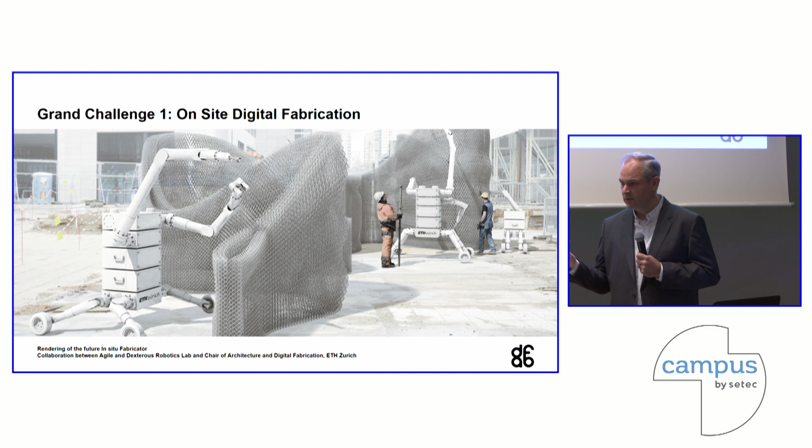So we see robots changing from being these big, heavy machines to being much more lightweight, fluid machines that can operate in conjunction with people and that don't pose as much danger to people as the robots we know from current manufacturing facilities.

Getting back to the NCCR digital fabrication, we have these two areas of focus. We have on-site construction, where we're looking at robots, taking them out of their space, giving them sensors, making them contextually aware, making them able to work with humans on the construction site. At the same time, we have prefabrication, which is really the question of how you build things which you then transport to site.

We have the ability to control the tension at the individual nodes within the net so that we can reformulate the shape of the net actively. So as you apply concrete to it, the net sags, we can tighten up the net and it will go back to its shape. In that way, we can completely eliminate formwork while creating complex structures.

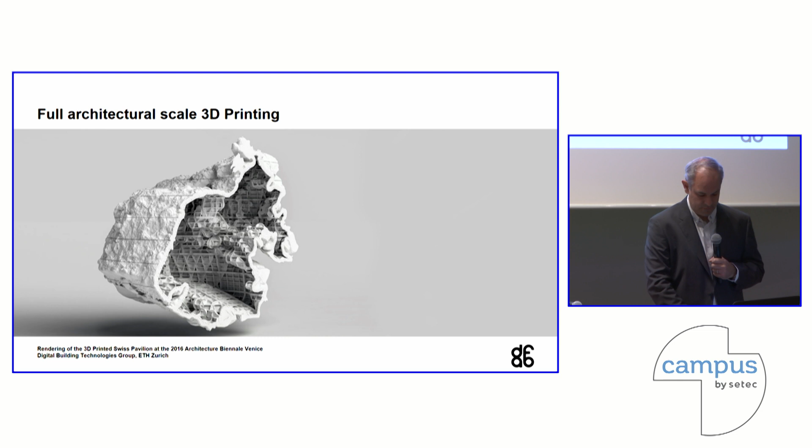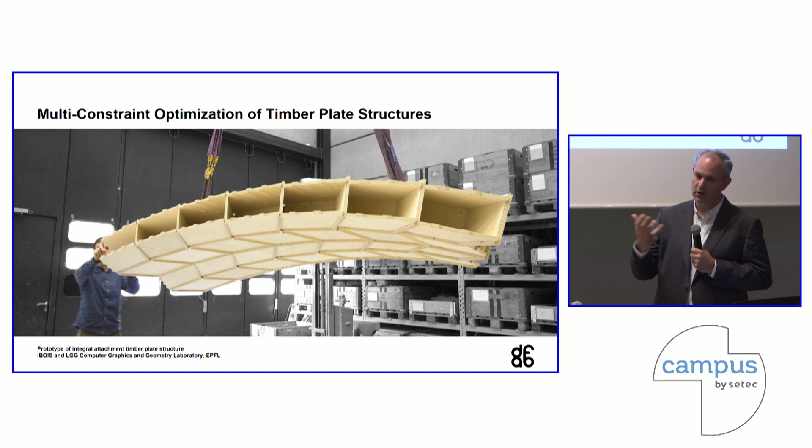We look at the robotic joining of structures.

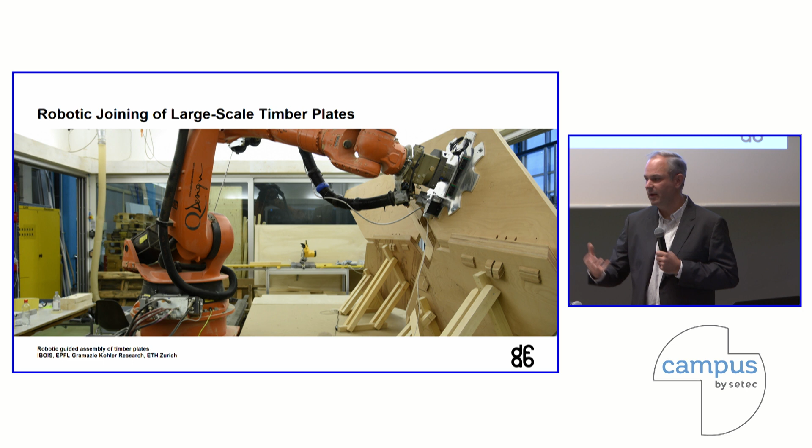The easiest way to imagine that is that a brick is the size it is because a mason can lift and place a brick all day long. If you replace the mason's arm with a robot arm, then what's the size of the new brick? Because the robot arm you can make any size, and you can use it to twist and join things in very prescribed, very accurate ways. All of a sudden you have new ways that you can join things together with only the force of a robot behind it rather than the limitations of the human hand.

We can take that even further and say what happens when you have two robots working together. When you have two robots working together, you can use one of the robots to hold things in place while the second robot positions the next piece. You can completely eliminate structures, scaffolding, formwork, and all the other componentry typically used to place things very precisely in three-dimensional space, such that you're able to build up composite structures.

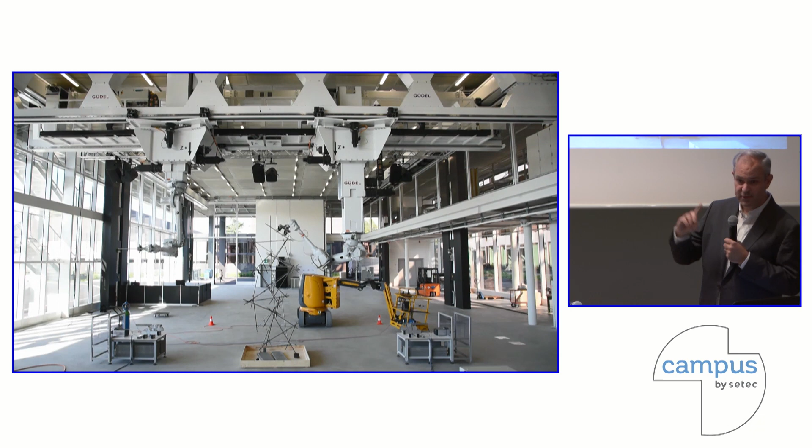Now, as you're watching the video, please pay attention to the sun because you'll get an idea of how slow this process actually is. The structure was built over the course of two days because all of these things we do are prototypical. We've never done them before, and if we do them once, we typically don't repeat it again. That means the processes we're involved in tend to occur over longer periods of time. But we know that after we've done it once, we know how to refine it, we know how to take steps forward, and eventually the goal is to hand it off to industry.

Switching out of the fabrication facilities and into the real world, we also build mobile robots equipped with sensors and manipulators to do things like build these brick walls, which ETH is very well known for. This is a robot that can move itself around the construction site, from one place to another, thereby effectively becoming a 3D printer. But rather than dropping little blobs of material to create something, it picks up building components, whether bricks or pieces of timber, and that allows it to build structures much bigger than itself.

It also has the ability to know its accurate position in three-dimensional space. Like a construction worker, if I move from one place to the next, I have a bunch of references I can triangulate and then place the next piece. This is very easy for a person to do, but extremely difficult for a robot. So a lot of the research on this platform was put into making sure the robot knows accurately how, when it moves from one place to another, it can continue to build with construction tolerances in sequence.

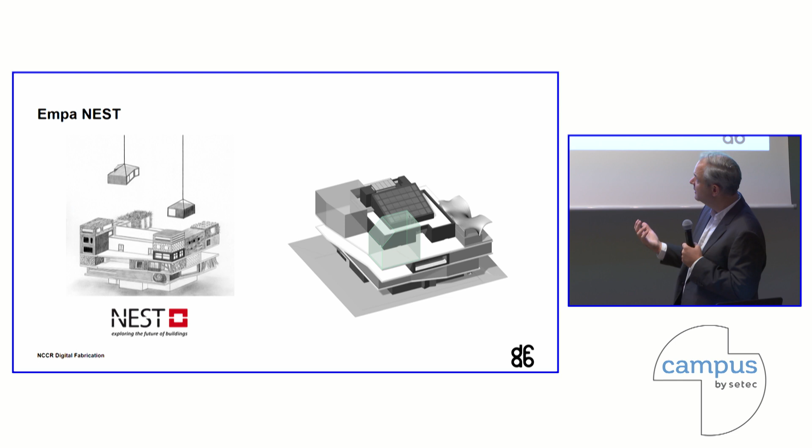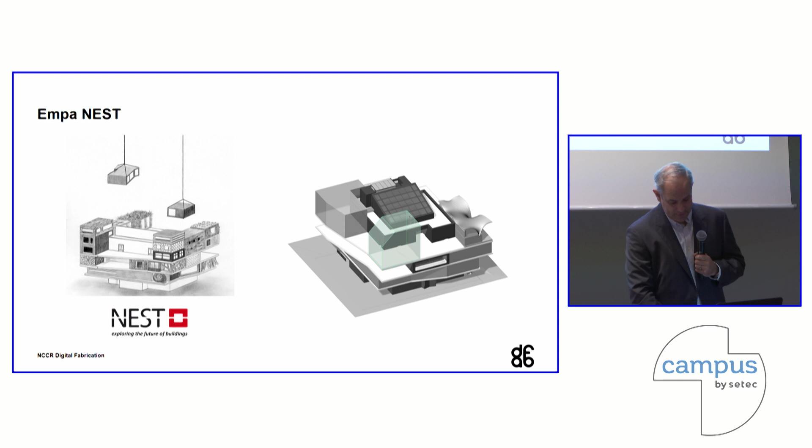The building provides all of the backbone services - heating, ventilation, air conditioning, water, and so on - but it also provides monitoring systems. This allows us to do research into building science in a semi-controlled environment, but the modules are actually inhabited. The NCCR Digital Fabrication is designing one module called the DFAB House.

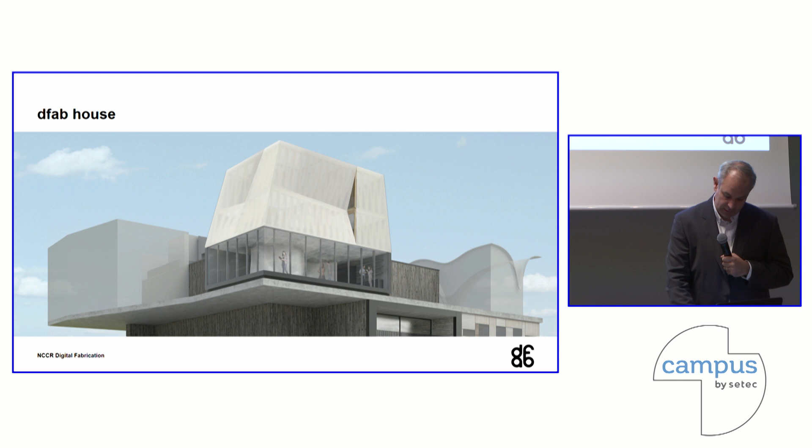Hannes will talk a little bit about some of the technologies going into it. We're also involved in a second project called the HiLo, a project by the Block Research Group. The driving design idea in it is this ultra-thin concrete shell roof - and this concrete shell roof brings me back to this picture of the cable net.

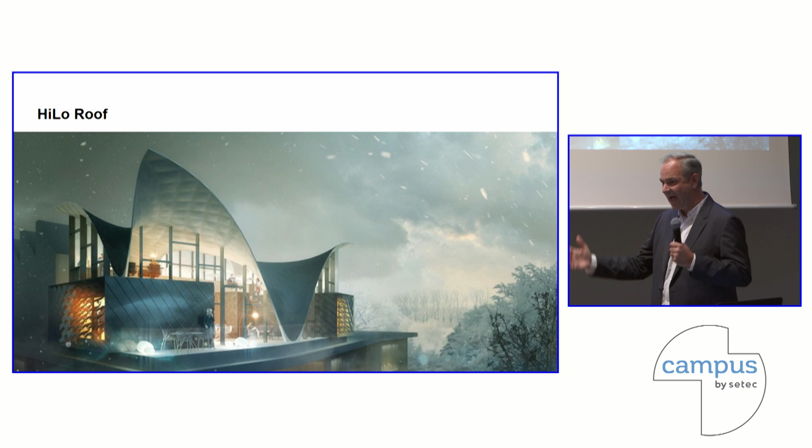You can see in the picture of the roof the pillowing at the bottom of the concrete shell. This roof is being cast without formwork, so there's no scaffolding or structure determining its form. It's all a tensile cable net strung between the buildings or sections already there, controlled by placing a textile membrane on top of the net and casting concrete directly onto it with carbon fiber reinforcement.

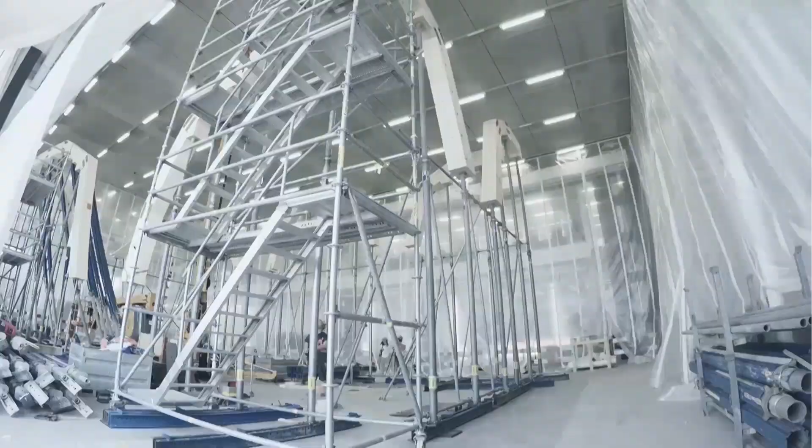This is a short video of the process. The cable net was designed to be dismountable and used again in other configurations. This is inside our testing hall, a one-to-one prototype since it's never been done before. The concrete shell is at its thickest 12 centimeters, but at its thinnest approximately 3 centimeters—an extremely thin shell reinforced with carbon fiber, which you can see here.

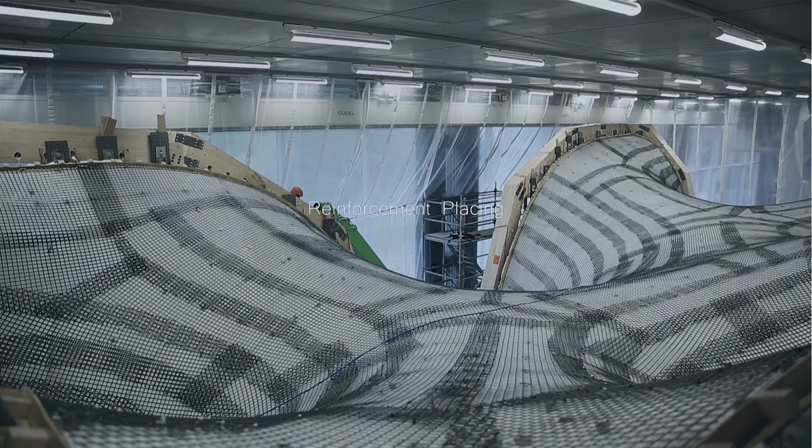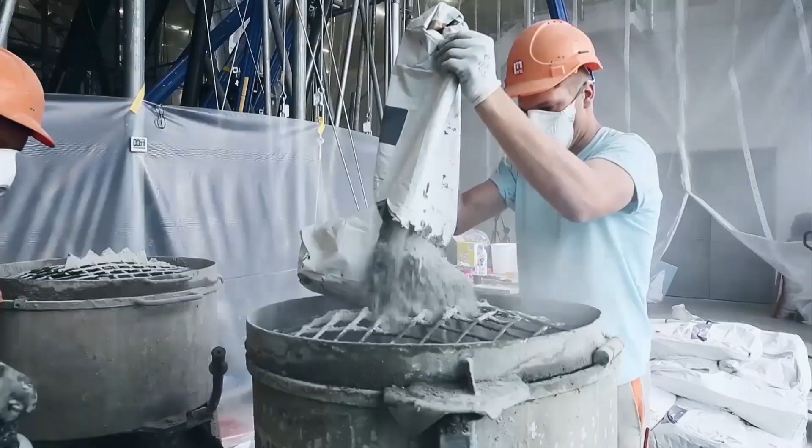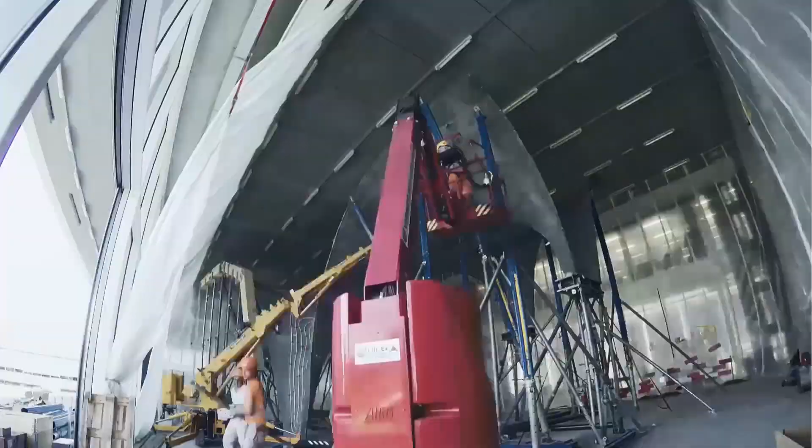It's actually shotcreted, and they developed a vibrating hand trowel. By hand, they spray the concrete onto it and trowel it into place to get the desired thickness. You can see the teams building it up. Again, this is a one-to-one prototype, so we build the roof twice—first in the protection of the hall so we know what we're doing, before taking it up to the top of the building in the wind and rain and under all the forces.

So there you can see the end product. There's another picture of it here. This is the component of the roof—it's quite like a cathedral underneath it, and it was up for a couple of weeks.

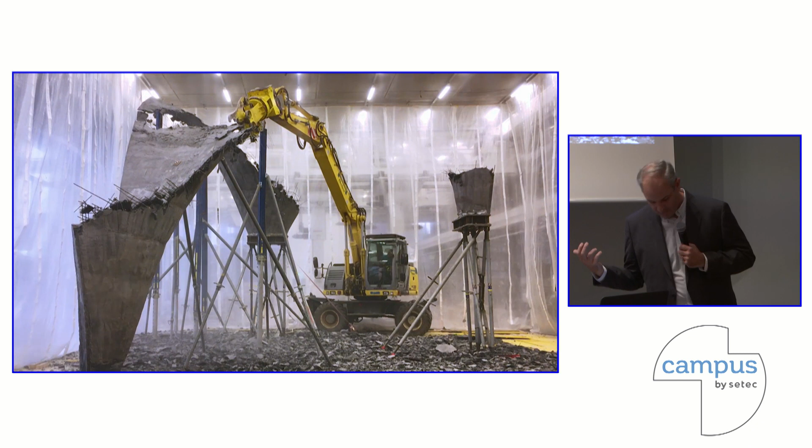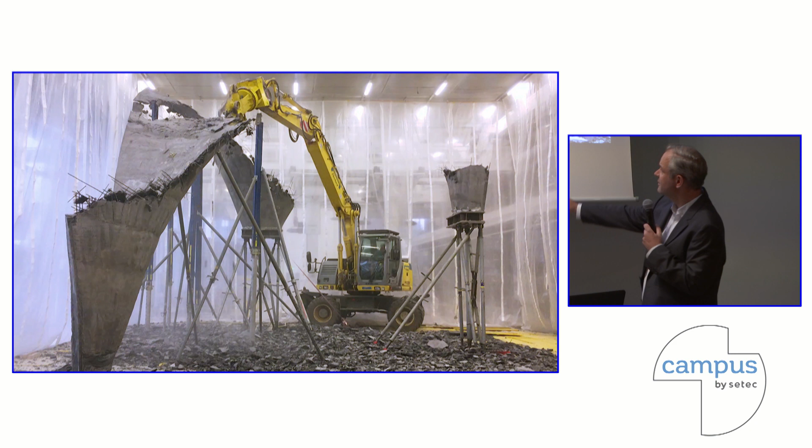But of course we also need to pay attention to how these things come down, so we had to dismantle it. We only have a certain amount of space in this robotic hall, and there are other experiments. But what's extremely interesting here—let me go back—is look at how little material is on the ground.

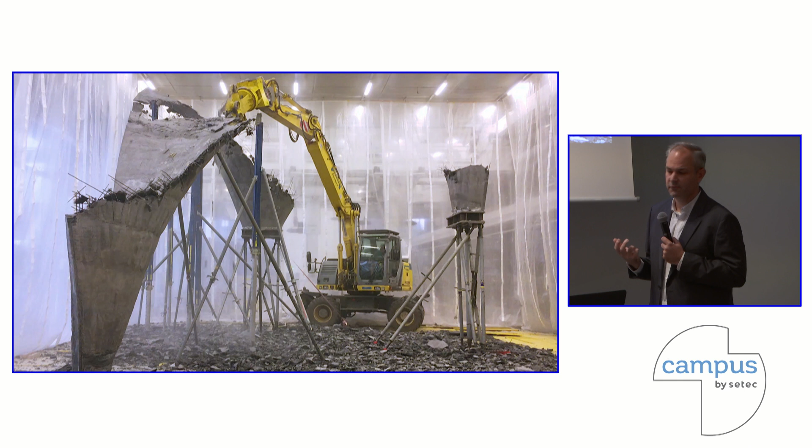This entire shell, which could cover basically this room, had only 4 cubic meters of concrete in it. That means not just low cost in terms of material, but also low embodied energy, at the cost of a huge amount of information that was required to build it.

So just to finish up my part, the NCCR is really about building an international and multidisciplinary approach to this idea of technology in architecture and construction. We have a mandate for direct technology transfer to colleagues in industry.

Being a Swiss national institution, we're very focused on supporting our colleagues in Switzerland, but we also deal extensively with international groups. We validate our research under real-world conditions because that's the only way to convince industry colleagues that our technologies are ready for prime time. We have an education and training program because industry is concerned, when adopting new technologies, that there's a steady supply of people ready to use them. And we have a very strong international and cross-institutional outreach program.

Just the last couple of days I was at the Design Modeling Symposium in Versailles. Today I'm here. In a couple of weeks we're in Boston, and a couple of weeks after that I'm in Australia. We're really reaching out to make people aware that these technologies are here now, that they're coming into industry, and we're excited to engage with people to bring that to the fore.

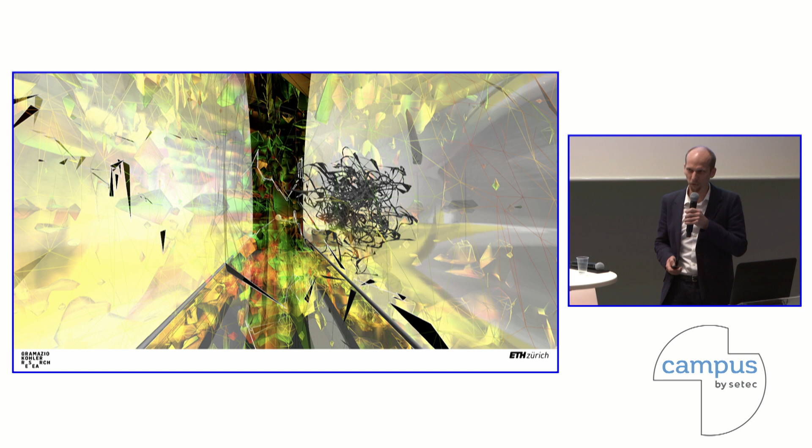When we started in 2005, the digital was mainly understood as the virtual in architecture. So the question is, when you are in a Swiss building culture celebrated for its architecture—such as the thermal bath by Peter Zumthor, and also think of Herzog and de Meuron, Meili Peter, and other practices...

How do you materialize the virtual? How do you turn digital data into a physical phenomenon? Our ambition wasn't so much to use the digital as a way to generate more virtual forms, but to investigate how information drives the material world. So we coined this term digital materiality.

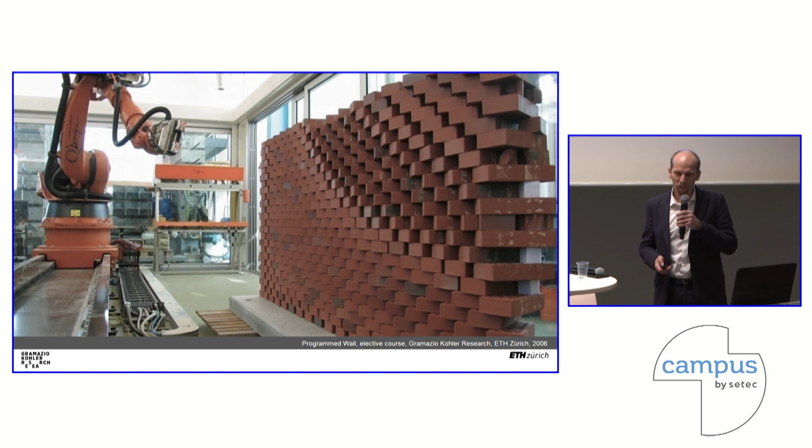What you see here is one of our first projects from 2006, with our first robot, a KUKA robot on a linear axis. This robot basically rotates each individual brick to a unique angle. Imagine doing that on site: the laborer would have to measure each piece, check it against the plan, and place it individually. It's not economically viable, but for the robot it's a simple task, because it's fed a set of data on location and rotation, and it simply places the bricks piece by piece.

So this is the start. From the beginning, it was important for us to embed our research within the Swiss building environment. Here's a very early project from 2006, where we contributed these wall panels to a winery designed by Bearth and Deplazes architects in Chur. So that was the start.

Now a big leap forward to our largest project to date, the sequential roof, which covers the top level of our institute, the Institute for Technology in Architecture, as Russell already showed. What you see here is a timber construction, a timber frame beam construction, covering 2,300 square meters with these subtly undulating curves and forms.

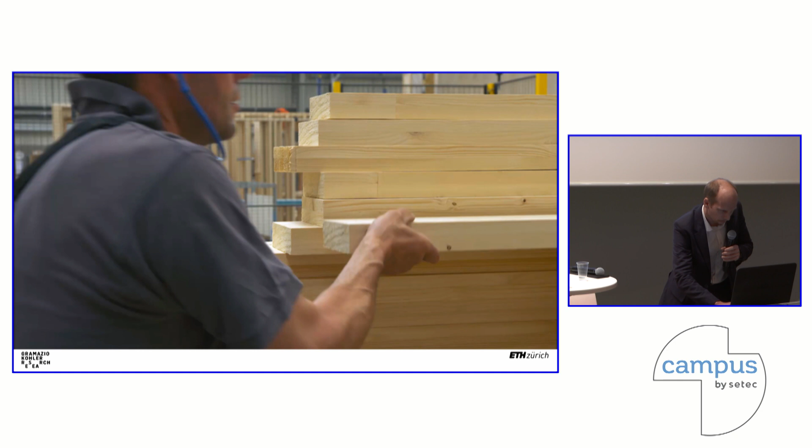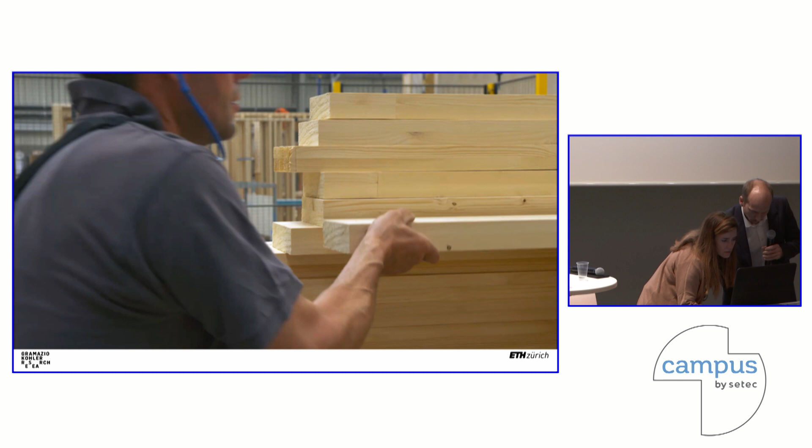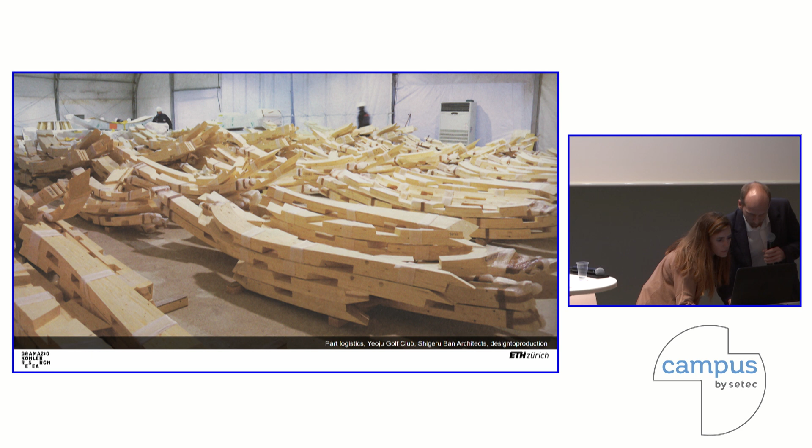It's a video that should start. Ah, here we are. So sometimes it's the simple technology that lets us down. Let's focus again on the more complicated technology.

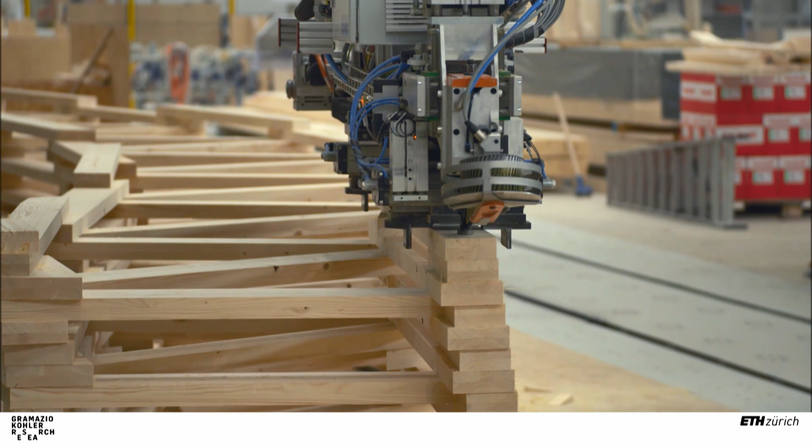What we did is develop an integrated process where the portal robot, bought by the company Erne, a specialist in timber construction, lays out these bespoke cut pieces. You can already see the form of the timber frame beam taking shape, and step by step, like a 3D printer, it places the pieces and nails them together in an integrated process — it's an integrated tool.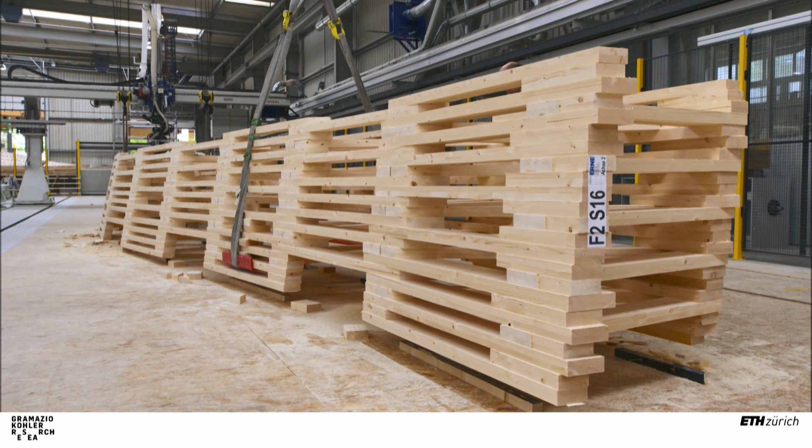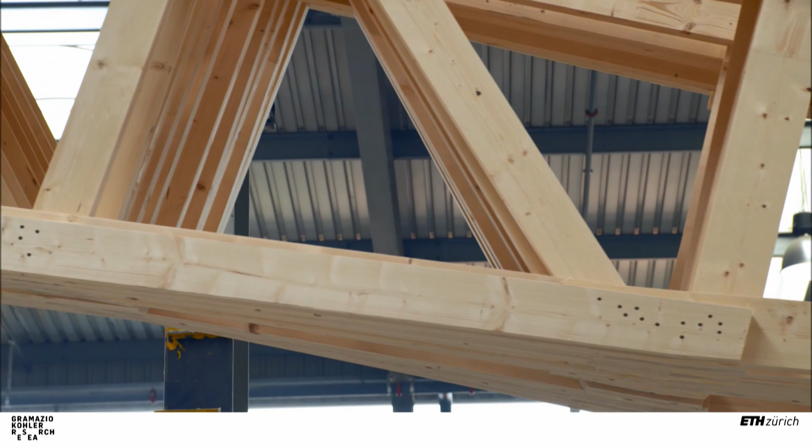You can also change its tools, using a circular saw to cut the end pieces. You nail these pieces together, which means you basically change the complexity from 50,000 pieces to 168 pieces, 168 beams, which you can then fit out with the sprinkler system and all the services required by building norms. Then you bring them on site and locate them in a conventional manner.

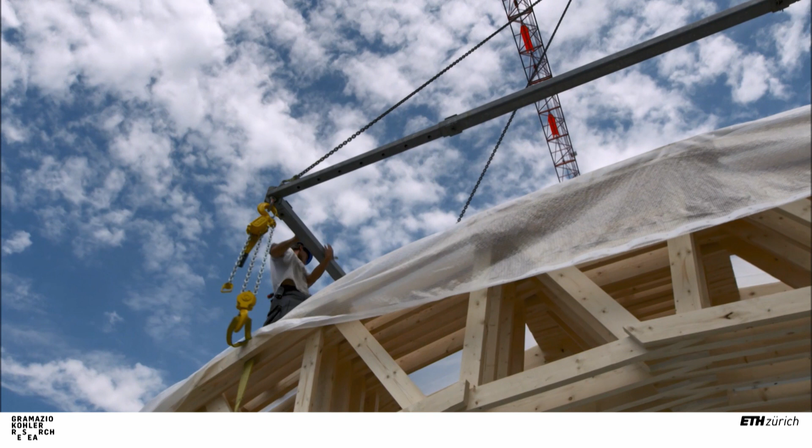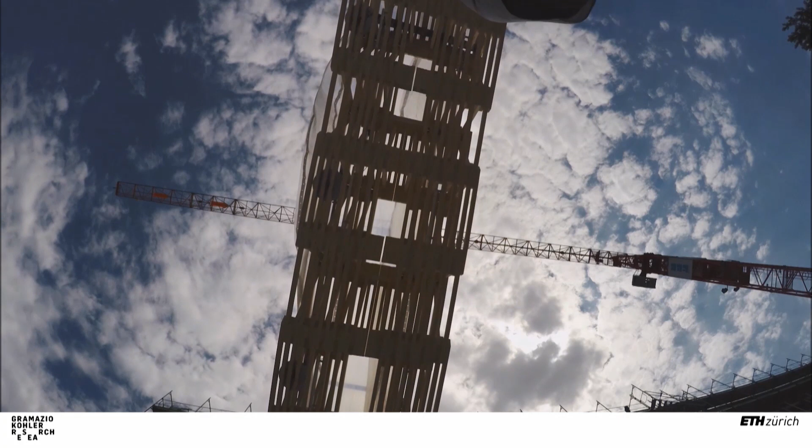Here you see the fit-out with the sprinkler system. The construction, the building system, is actually a very simple, straightforward system. From a structural engineering perspective, the roof isn't the most advanced roof, but the intelligence is really in the robotic process — in the integration from design all the way to the construction site — where these beams arrived last summer in 2016 and completed our institute building.

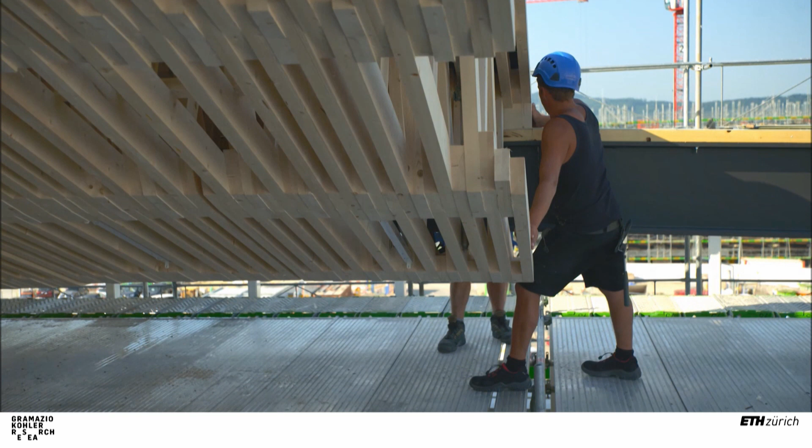So the key to the project is really what you see here. And what you see here, you actually don't see, because it's just a representation of data. We never created a plan that we handed over to the company — this is purely for representational purposes. What you see here is one joint with the nailing pattern that holds together the slats. We had 1 million nails that needed to be positioned according to Swiss norms, to take on all the stresses.

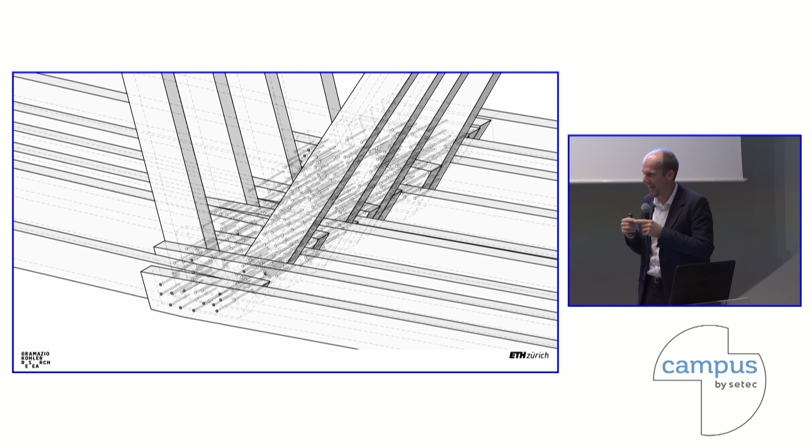So what we did is we wrote an algorithm that randomly placed the first nail and then calculated the position of all other nails, because in this situation, we don't want to hit the nail on its head or on the head of another nail. This is the challenge, which then results in this image or representation of the node.

So when you think about these robotic facilities, it's not just about the hardware, but it's also the software through which the intelligence is introduced to the project and to the design.

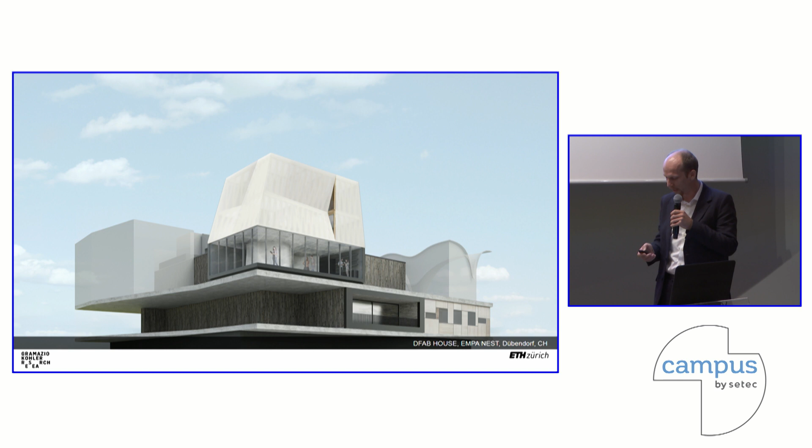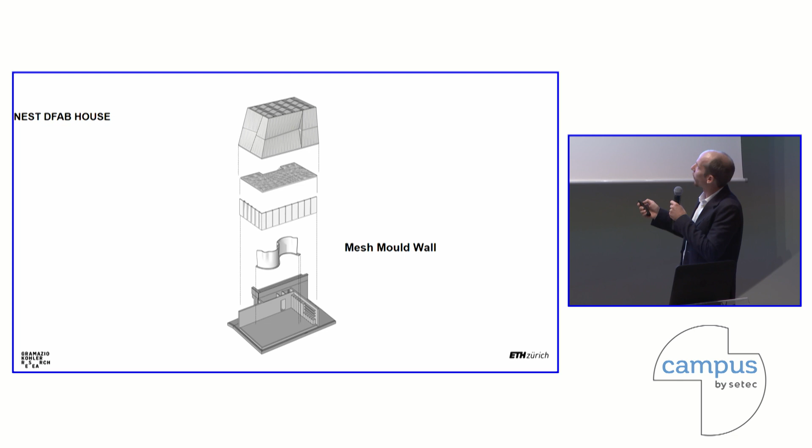So to move one project on, I want to present you Mesh Mould. Mesh Mould is one part of the DFAB house that Russel has already presented. It's this S-shaped wall that then holds the smart slab, a concrete slab, and 2 stories of timber. It's a project about concrete construction.

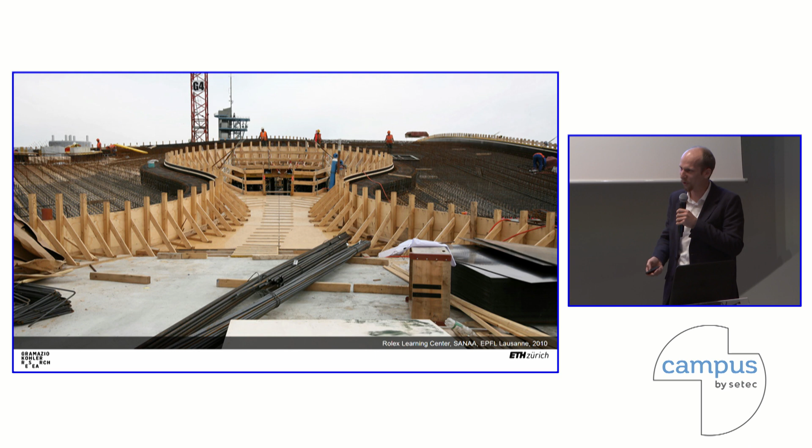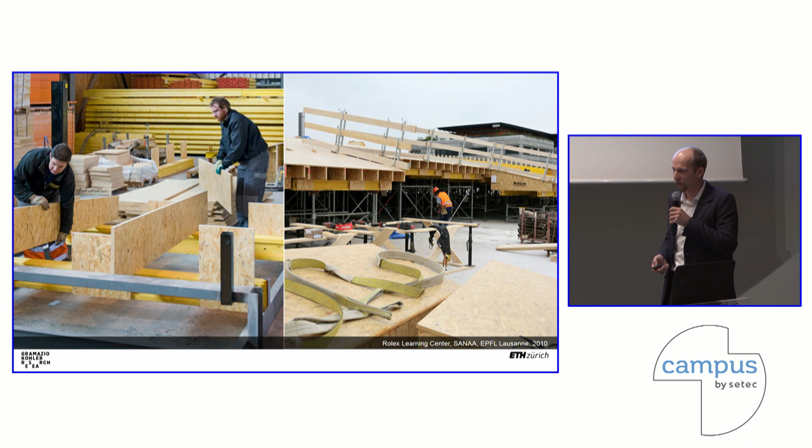As you know, when you have very elegant shapes, like for the Rolex Learning Center, and you want to do these elegant shapes in concrete, you end up with a not so elegant construction. You end up with a lot of effort that goes into the formwork. That basically means you build the house twice - a timber one, and then a concrete one, and then you get rid of the first one. So that means, again, you have a lot of labor-intensive process. For the Rolex Learning Center, the formwork was still assembled by hand, even though it was driven by digital data. And of course, you have an unsustainable process generating a lot of waste.

So we wanted to change that and look ahead and develop a more sustainable approach. And what we said is, well, you have the rebars inside the concrete, and we want to use these rebars, dissolve these rebars into a mesh. And the mesh can then withstand the pressure of the viscous concrete.

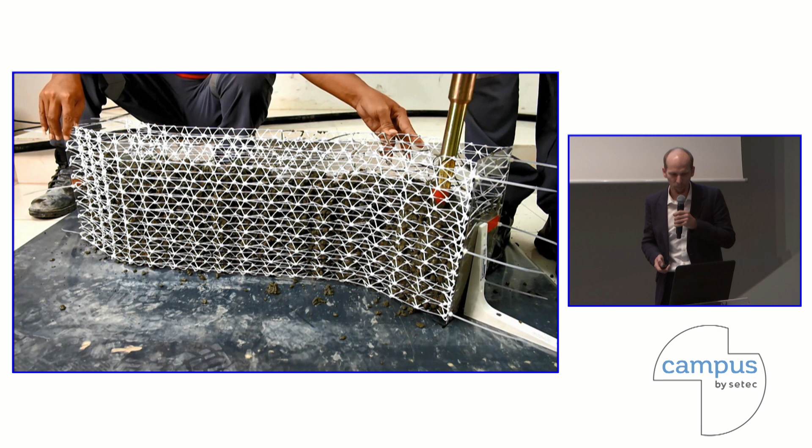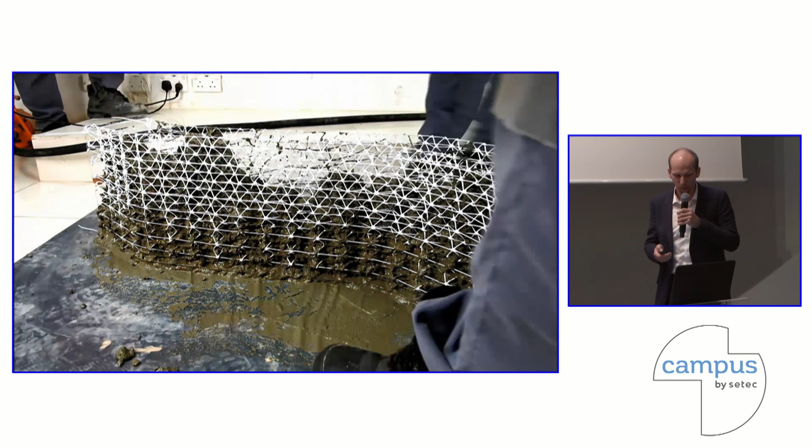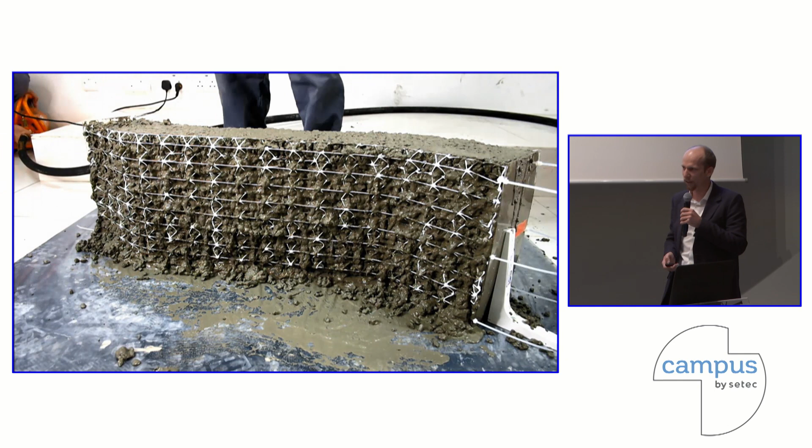So we did a proof of concept study, as you call it, a few years ago at our lab in Singapore. Here you see this thermoplastic mesh, where we then poured the concrete, compacted it, and it showed us that this very thin mesh made out of thermoplastic, extruded by a robotic end effector, could withstand the pressure and the load of the concrete. So for us, that was a start into a long research project that would then become part of the NCCR.

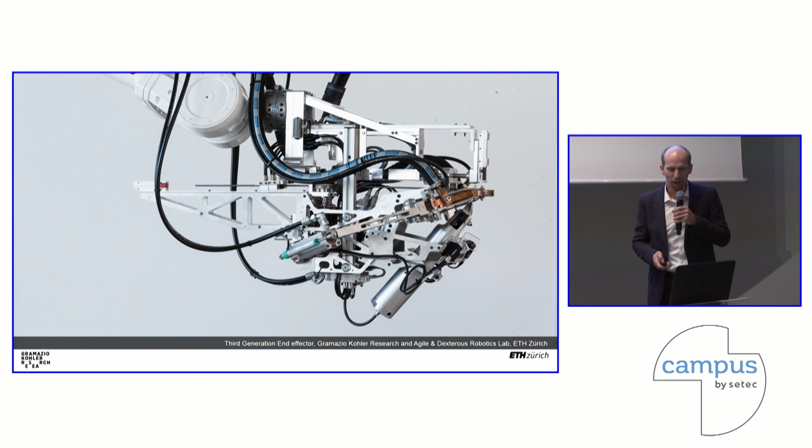That allowed us to collaborate with the Agile and Dexterous Robotics Lab, which then again allowed us to develop this end effector for the robot, where we're now able to cut, bend, and weld 6mm reinforcement bars.

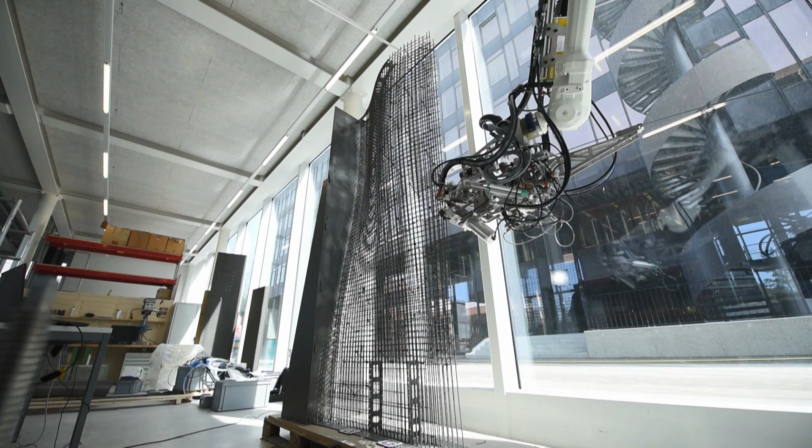So here we see the process. You've already seen the in situ fabricator, our mobile robot, in Russel's presentation. Here you see the machine in action, how it vertically, step by step, welds this mesh. It's like 5 to 6 centimeter long pieces that are cut and then spot welded together. Now, this is in a lab - an environment that is fairly controlled and safe and stable for a robot. So this is the easy part of it.

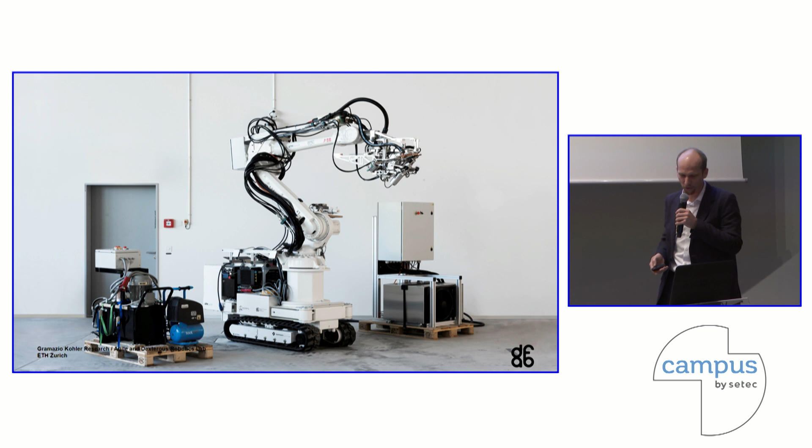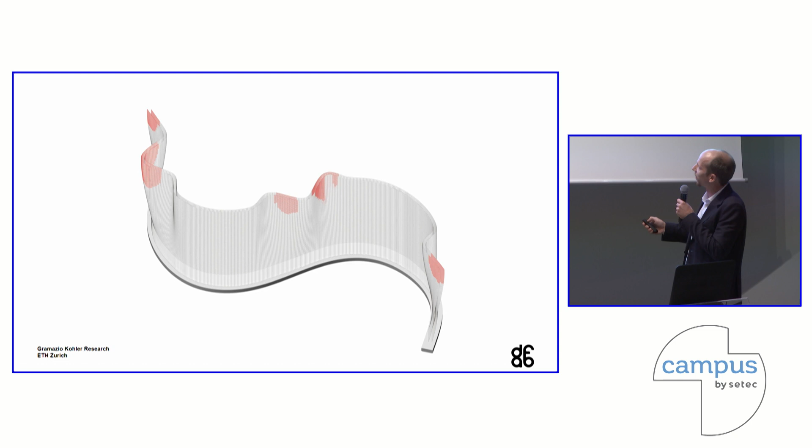But then we packed it up - the whole system, the robot, the controller, the end effector - put it into a container and moved on site, where we executed the computationally designed wall. So again, it's this S-shaped wall, and here you see how the mesh was generated in order to take on the specific load cases with these subtle undulations that locally respond to stress.

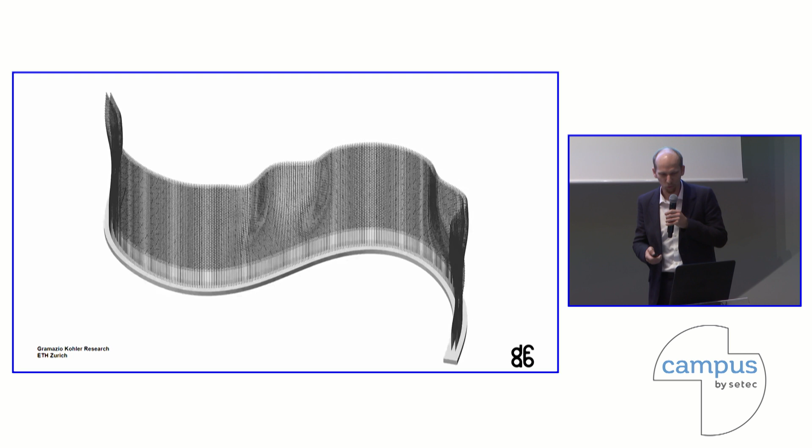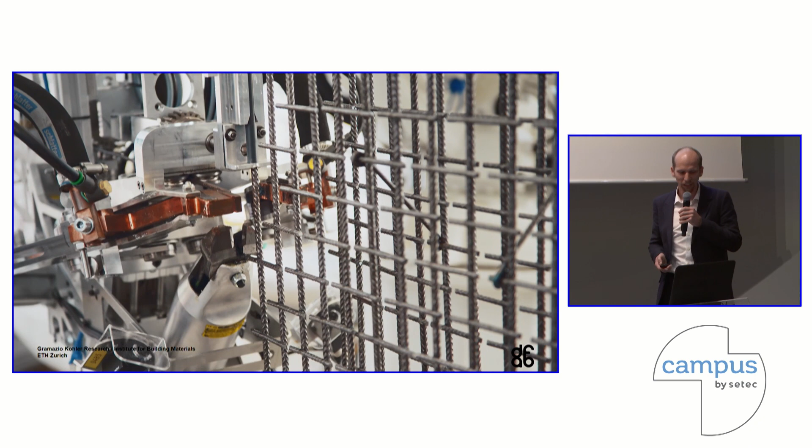And so we went on site with our robot that has a visioning system to locate itself, so it knows where it is. It has cameras that check and control what it does. It takes in all the data we send to the robot, and here you see the end effector in action, how it spot welds these small pieces, cuts them, and assembles the wall.

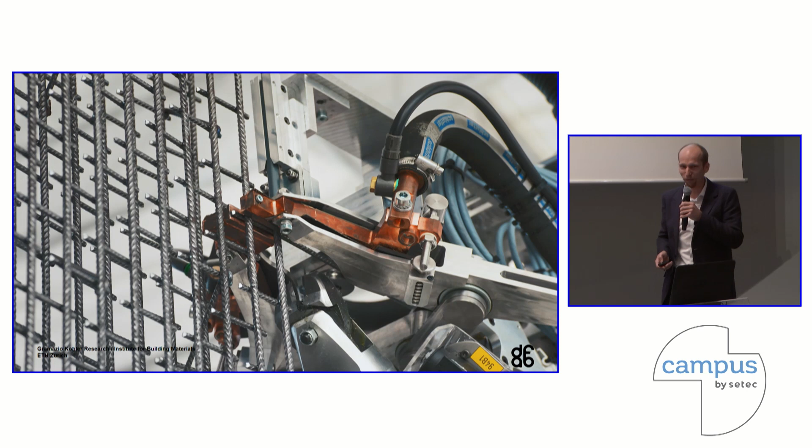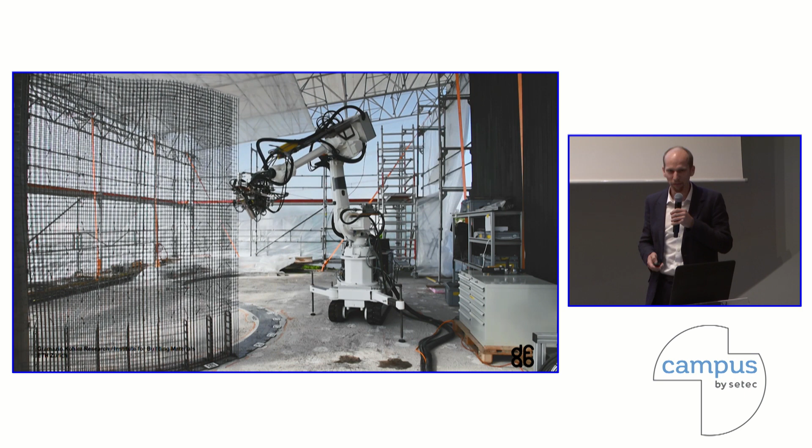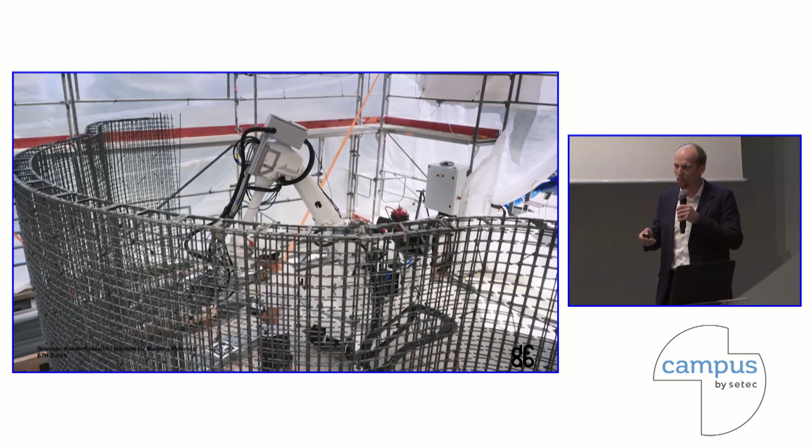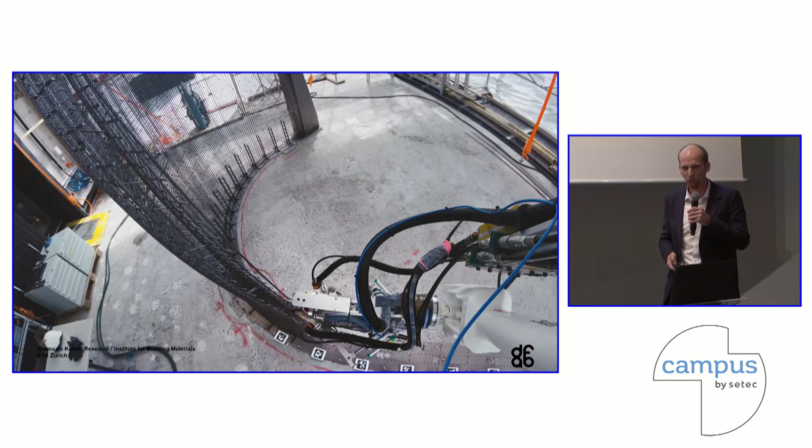Again, it might look very sophisticated, but it's really the start. We're now at a level where we are very much in control of the process, but again, if you think of moving it on site, building large constructions like the Rolex Center, there's still a long way ahead of us.

But of course, we can say, is it still the right time? Is it still the future to focus on concrete, for example? Don't we have to think radically different and explore systems that are even more radical or unconventional and really challenge our beliefs and our paradigms? In a way, we always move between avant-garde and culture, avant-garde being few, being ahead, and culture meaning transporting these ideas to the wider community, the industry and the culture. So Jammed is a project that basically...

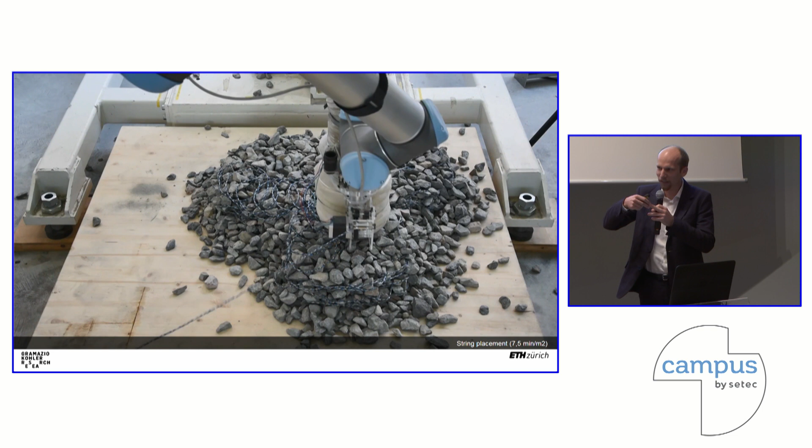...holds together loose gravel by laying string, robotically laying string. So it reinforces loose material. It works like a multitude of belts that hold together that loose gravel that wants to move. In that way you can stabilize the system under a loading condition, where then the small gravel interlocks, so it forms stable structures.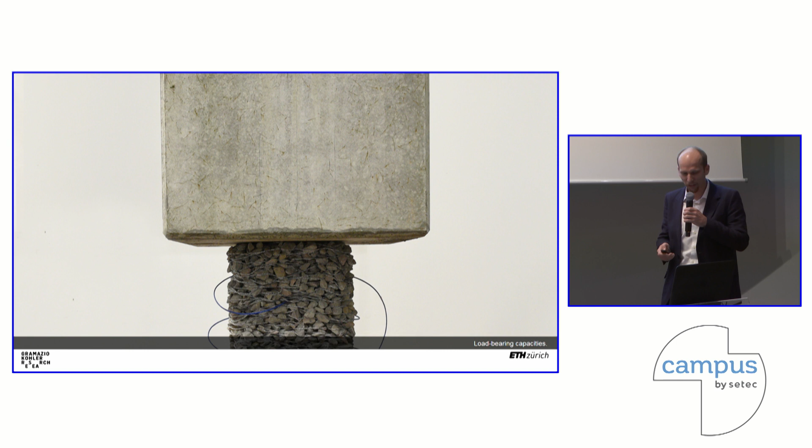Amazingly, we can put 10 tons, 17 tons on the load testing device, on a 40 centimeter diameter column, just made from loose material, gravel and string, the string you can buy in a Swiss post office or a French supermarket. You just buy the string and use normal gravel to build these structures. The first time we exhibited this was 2015 at the Chicago Architecture Biennial, where we used Misapor foam glass gravel...

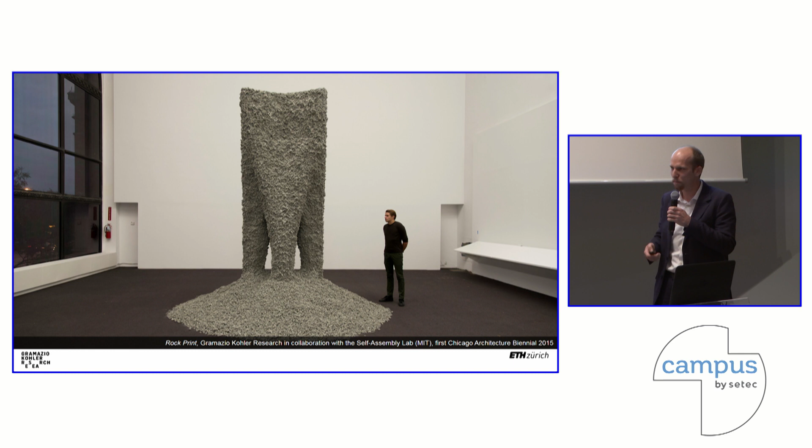...which is lightweight because we couldn't put that much load on the floor. But the amazing thing is you can build stable structures with that system. Once you're tired of it, or once the exhibition has finished, you simply wind it and you end up with a heap of gravel and string. In a way you could say it's really a kind of architectural or structural perpetuum mobile, where you constantly rebuild the structure. From an architectural perspective, loose material has always resulted in a heap. Now, through the placement of string, we're able to inform the loose material in such a way that we can turn it into architecture.

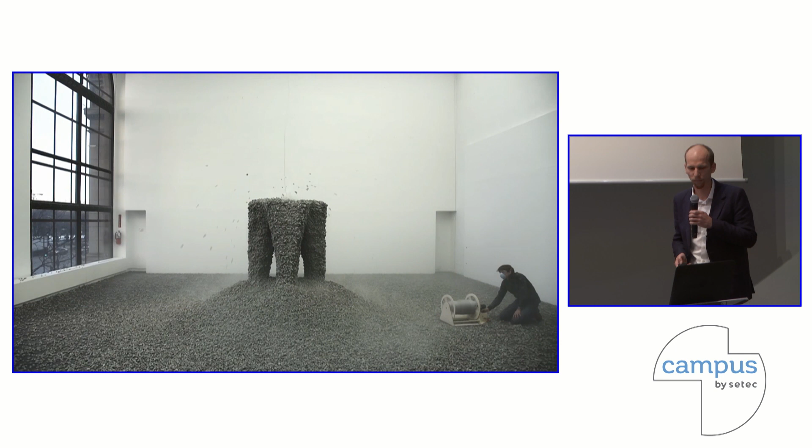So we've continued this research and we are now working with real gravel, and we are actually working without a mold. It's a moldless system that is solely based on the pattern, on the way we lay the string.

Now if you think this is crazy, it might get even crazier. A classic in our field of digital fabrication in architecture is the limitation of the workspace. You have a machine, for example a 3D printer or a robot on a linear axis, and it has a certain work range in which it can act, which means you have to build parts and assemble them. Now the question was, how can we exceed that workspace? How could we go beyond it, not using a conventional portal system, which we have also installed in the robotic fabrication lab?

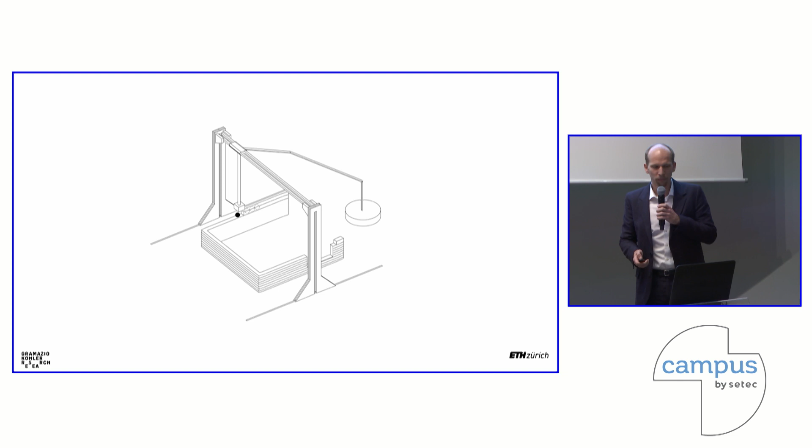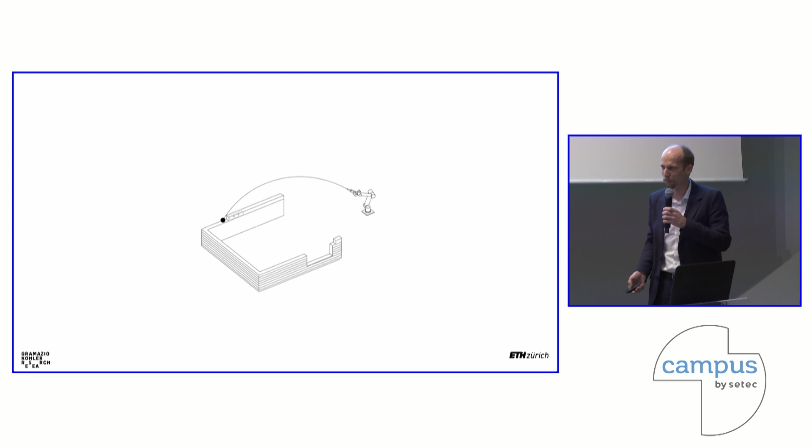So what we thought could work is: if I cannot reach, I can throw. But of course this is a tricky task, and when you think of the history of throwing and the science of ballistics, shooting has always resulted in destruction. For thousands of years it was turned against architecture and wasn't working in favor of architecture. So we, in a way, civilized, disarmed the process, and with the help of sensors and feedback, got on top of the problem of ballistics.

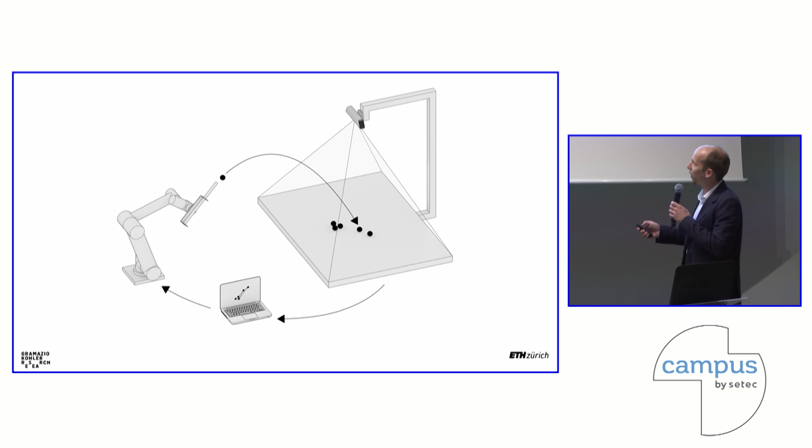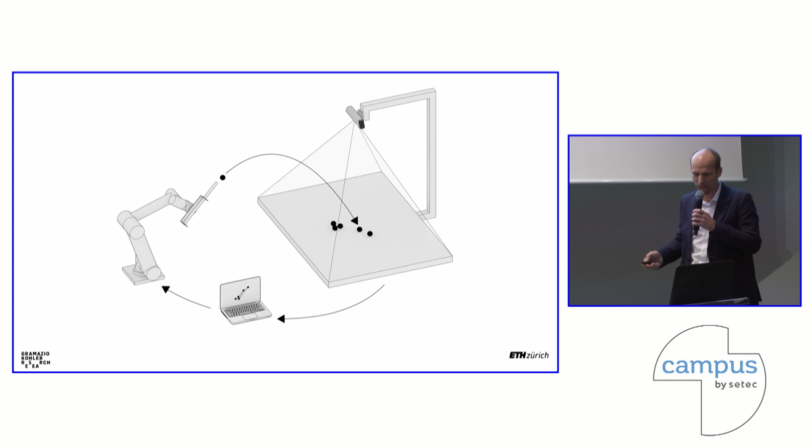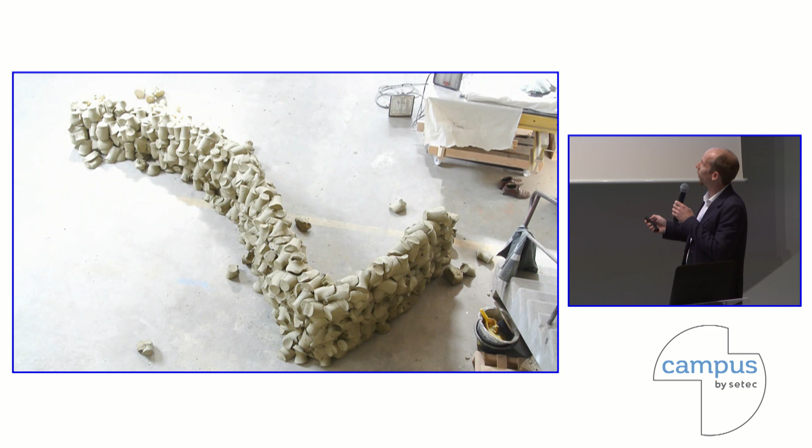Basically we have a small robot, we shoot, we control whether this is right to what we calculated, we improve the calculation and the shooting apparatus, and we shoot again. At an art institution in the east of Switzerland, we extruded many clay projectiles, clay guns, and used them to shoot and build walls. When you look carefully, you see how these bullets of clay land and form rather slender walls in the axis of the shooting. So here they come.

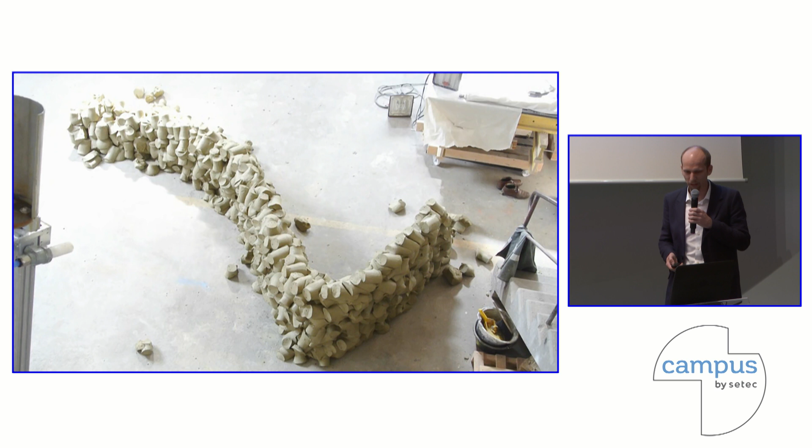While it might look very playful, it also emphasizes the importance of feedback systems, of reading what you've built and feeding that into the loop, so to learn basically. This is also a big topic in our field, the whole area of sensing and machine learning.

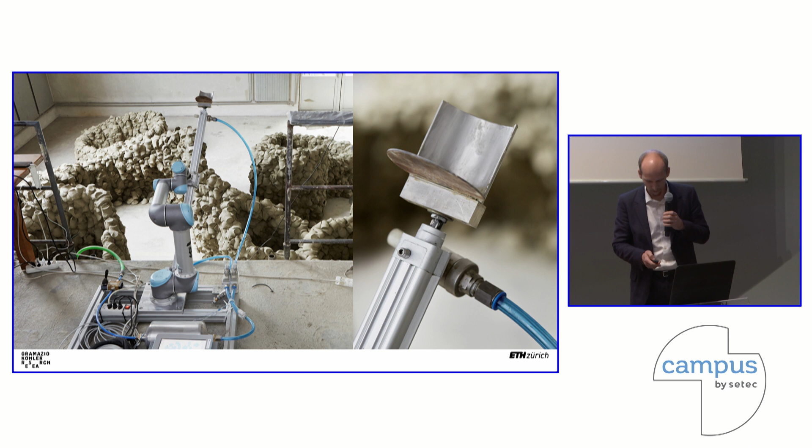Now this is the machine, very simple, a small UR robot with a pneumatic pan. Here goes the clay, and then you shoot according to your computational model, day and night, and you end up with these structures that in a way show that very archaic, natural, sustainable material can be combined with high technology. So it's a different understanding of smart materials, it's smart processes, it's our intelligence that goes into these processes and hopefully creates a better and more sustainable future in construction.

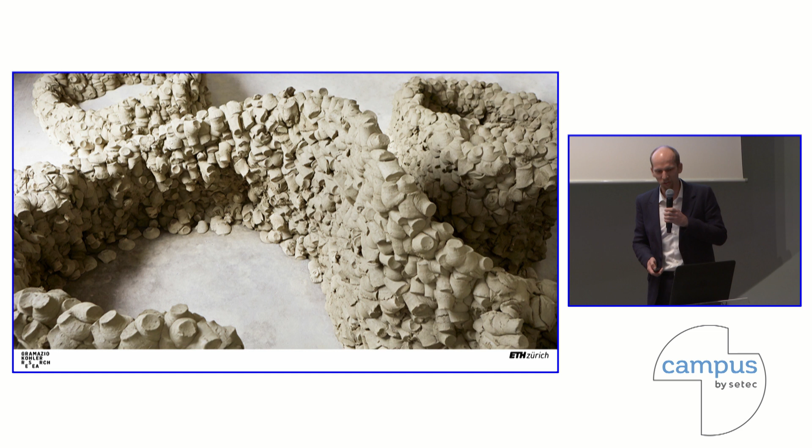Thank you very much for this amazing presentation. A lot of information, a lot of projects, very exciting. So, do you have questions in the audience?

Yes, hello, thank you for that. I just have one sort of technical question. When your string structure, it looks like the string is being glued, or is it just cast around? Because if you could explain, I saw an image with the line going around.

No, there's no glue, no mortar, no binder involved whatsoever. So it's really just the gravel and the string. When we moved it from the load testing device and layer by layer excavated to investigate what's in there, we realized that the string is actually cut into many short pieces. So eventually under pressure, when it compacts, it's really the rock that interlocks, and the string only has an intermediary function of holding the gravel together while building it up.